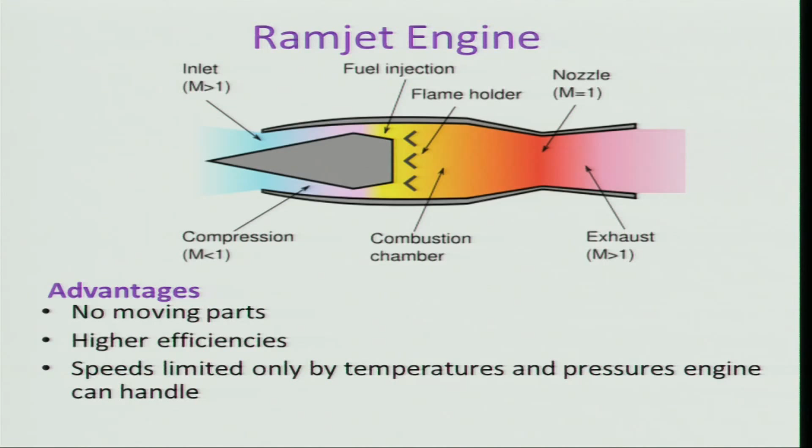It has several advantages over the turbojet engine categories, because it does not have any rotary parts, it is quite light compared to others, it has higher efficiency, and its speed is limited only by the temperature and pressure the engine can handle. That means material problems can be avoided, but its disadvantage is that it cannot start on its own, particularly for the initial takeoff thrust. That is the big problem, and as you go along you will see how it can be solved. This is being used in missile systems as of now.

There is another exotic engine which has come up, known as the scramjet engine. Unlike in the ramjet engine, here combustion takes place in the supersonic mode. Keep in mind that this is quite an exotic and interesting engine, which people have been trying from the 1950s till date, however with very limited success. India has a very ambitious program of developing scramjet engines, and a lot of money has been pumped into it.

Two organizations, particularly DRDL and VSSC, are working at this moment on concept development of these engines, and it has several applications apart from the missile application. It can have terrestrial applications as well, particularly whenever the vehicle is moving in the atmospheric region. So, let us look at a schematic of that. The air intake region starts from here, and it is quite long, because the flow will be at a very high speed.

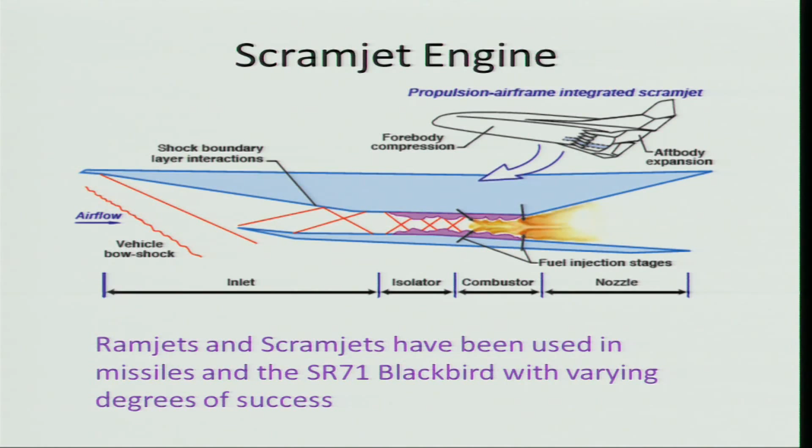And not only India, but several other countries like USA, Australia and others are working vehemently on it. But I have one question to ask you people: do we really need to have this engine, because it guzzles a large amount of money, and the material and other aspects also have to be looked at. So, particularly from the Indian perspective, whether we could look at it.

Of course, a lot of young people are excited about this engine because of our icon Dr. Abdul Kalam, who is an icon for the students to follow, and we should look at this aspect and see how it can be used for the common human being rather than for winning a war or for a limited number of people.

So, beside this we will be discussing how both the air breathing and non-air breathing engine concepts can be combined together, because each class of engine has its own advantages and disadvantages. Like a human being, each individual has certain good qualities and certain bad qualities, but when we combine together and work in a group, we try to maximize the good qualities so that society or a system can run. Unfortunately, it is not happening in India, but that is desirable, and it is more natural.

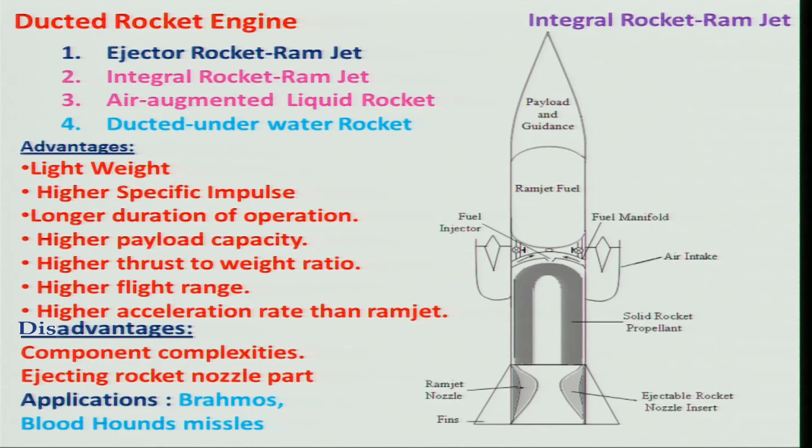Let us look at the air augmented liquid rocket engine. In this case, it will be similar in nature, but there is a little difference. There will be a rocket thrust chamber, which is not shown in this diagram, and you will take the air all the time, continuously feeding, and then there are liquid fuel injectors which will be working. That means you need not eject the rocket engine, because it is a liquid fuel rocket engine itself, but to start with you will start with the rocket engine, because enough air may not be there. After that, you will be going to the ramjet mode.

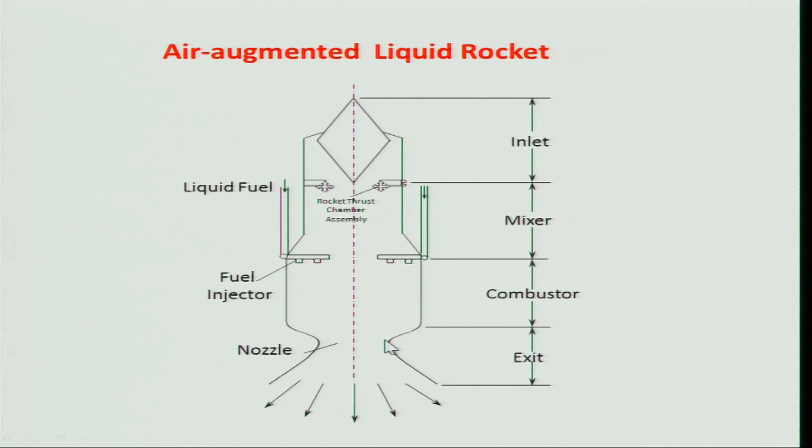Now we will be looking at the turbo-ramjet engine. Why are all these engines coming into the picture? Because of the inability of the ramjet engine to give initial takeoff thrust. In this case there is a turbojet shown here, and to start with the air will be coming through the diffuser or air intake into the turbojet engine, and it will have various components. As I showed you in the last lecture, it has a compressor, a combustion chamber which is not shown here, and a turbine. Of course, there will be a gas.

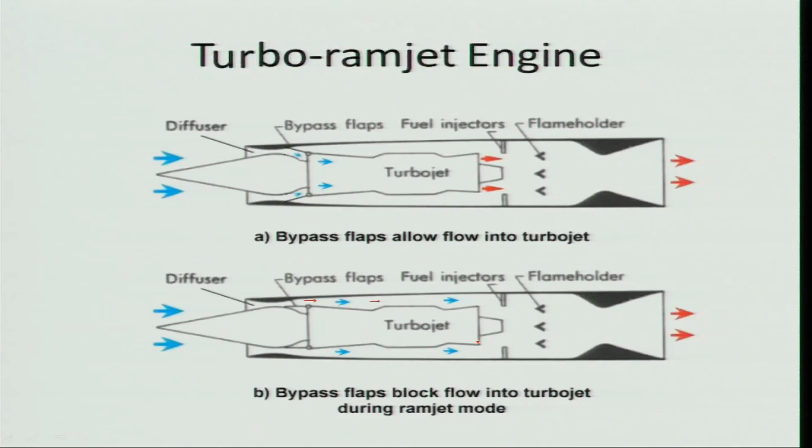In this case, a nozzle need not be there; it will be expanded in the other nozzle. These are bypass flaps, which allow the flow into the turbojet engine. Whenever you move into the regime where the ramjet can be operated, you can put the turbojet off with this bypass flap, which blocks the air from entering the turbojet. However, it will enter the ramjet components, and you will get the thrust. The good thing is that you can always restart the engine. That means it can be reusable, like you can land it and take off again.

But the bad thing about this turbo ramjet engine is that you will have to carry the weight of the turbojet along with you. So sometimes you will have to find out what the mission requirement is, and whether you can use it or not. It has been used for missile applications and other applications as well.

So, now we will be moving into the non-chemical rocket engines. Before getting into that, I have given you a bird's eye view of the new combined cycle engines, and several varieties are there; you can look at them if you are interested. However, I will not be discussing them now. We will be moving into the non-chemical rocket engines, in which I will be discussing nuclear power rocket engines, solar power rocket engines and electrical power rocket engines.

I will be giving you a very short, bird's eye view of the whole concept, and then I will be concentrating only on the chemical propulsive devices. So, if you look at nuclear power rocket engines, why does one have to go for nuclear power rocket engines? Why can't chemical propellants, which have been used from time immemorial, be utilized for the rocket engine? Can anybody tell me?

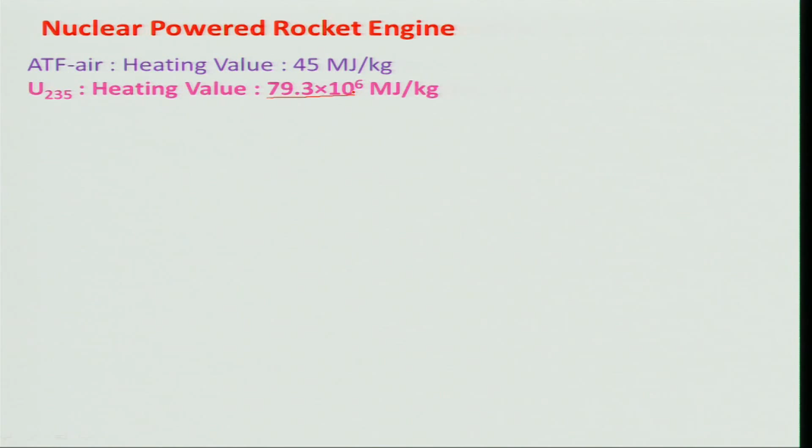Whereas if I use uranium 235 and bombard it such that nuclear fission can take place, the heating value will be 79.3 into 10 to the power 6 megajoule per kg. That means you can use a higher amount of energy for producing higher thrust. So, therefore, there is not much limitation. However, it is not that easy to use because of several problems associated with it. You might be aware that recently in Japan there was a catastrophic accident which caused a lot of damage to the people and the environment as well.

Nuclear power rocket engines can have three kinds of reactors: fission reactors, radioactive isotope decay, and fusion reactors. In the fission reactor, the nucleus of uranium 235 will absorb a neutron. During the process of fission, when uranium 235 absorbs a neutron, its energy level increases, and then it splits into two nuclei, one krypton and the other barium, and it also generates a large amount of energy.

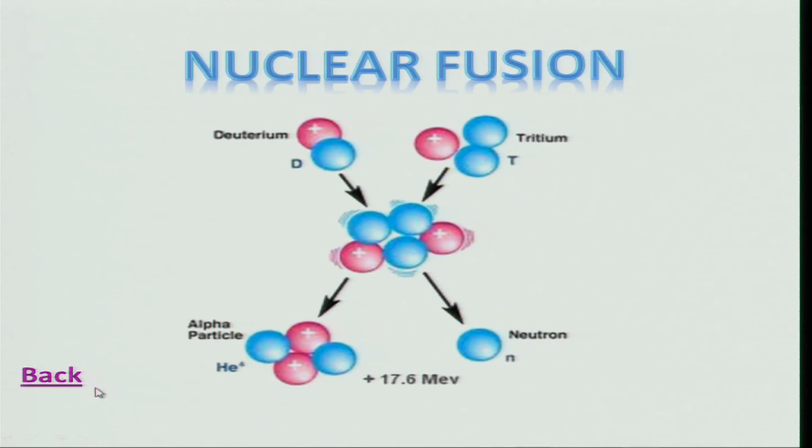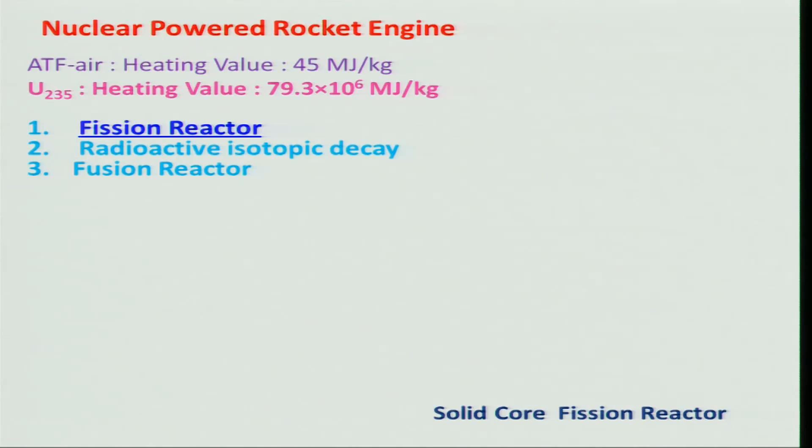And this energy can be utilized for rocket propulsion, but unfortunately till now it is not successful even in civilian use, forget about this application which is military and other planetary applications. And radioactive isotope decay generally happens, but it will not have much application so far as rocket engines are concerned. So I will be giving you only one example, that is solid core fission reactors.

The schematic is being shown here, and here you can use any other propellant which will have good thermophysical properties, or rather heat capacity to absorb the heat generated in these nuclear fission reactors. And here hydrogen is being used, and it is being pumped at a high pressure. It will go through the nozzle. You will look at the outer casing of the nozzle and also the reactors. This is typical of what is being used in liquid propellant rocket engines.

The hydrogen will be flowing through it, it will absorb some amount of heat, it will be converted into gas, and then it will be entering into the nuclear reactor core. And keep in mind that this has a control rod, as I told you that we need to control this generation of neutrons. So this will be controlling that, and this will be absorbing the heat. Of course, there is a reflector, cooling jacket and other things to contain the reactions.

And besides this, some of this hydrogen is also used to run this turbine, otherwise you cannot have a pump. And after that, it is a typical chemical rocket engine kind of thing. This is high pressure and high temperature hydrogen, which will be expanded in a nozzle, and you will get a thrust. So, if you look at it, a very high thrust level around 40,000 Newton or 40 kilonewtons, even higher, one can get easily, and temperature is restricted to 2500 Kelvin. However, higher temperature one can use, provided better material is available.

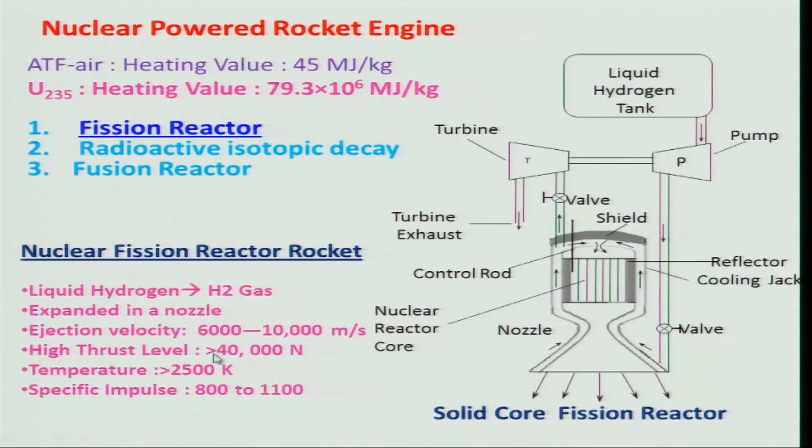And high specific impulse you will be getting as compared to chemical rocket engines, and ejection velocity you can get at very high values. And we will be looking at the electrical power which can be used for producing a thrust. And of course, these engines have a limitation of lower thrust. However, they can be utilized in space, particularly outer space, where the thrust requirement is not very much.

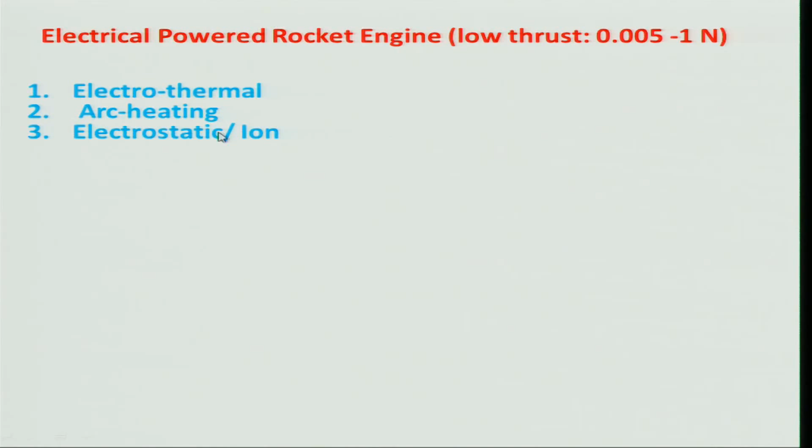And there are several ways one can think of: electrothermal, arc heating, and electrostatic or ion formations. I have taken only electrothermal rocket engines, where electrical energy is being utilized to generate some heat. You must be aware that heat can be generated by several means. One of the easier ways is using a resistance. You can have inductance, you can have other ways of generating heat, converting electrical energy into it.

In this case, what I have shown here is basically a heating coil, what we use during the winter season to heat the room or for food preparation. It is as simple as that, but it has to have a little more energy density. That means the amount of energy released per unit surface area must be higher, because it must be compact, and then you can use various propellants. Propellant can be hydrogen, it can be nitrogen, it can be ammonia, it can be any other thing, and in some cases you can use some kind of monopropellants, where it can react and release energy as well.

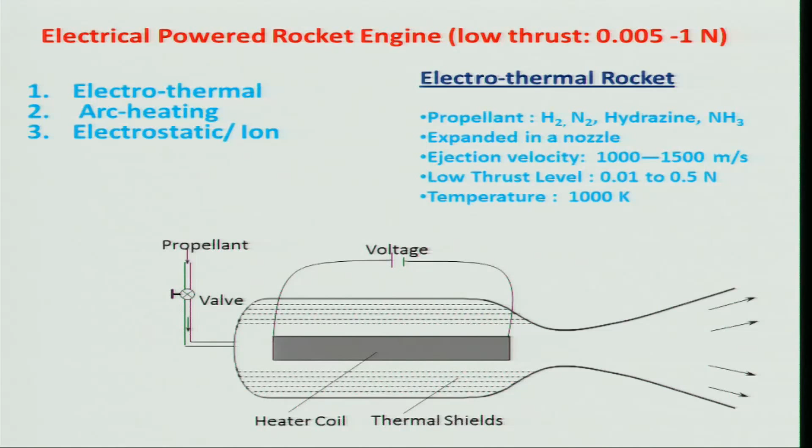And it is like usual rocket engines, where the high temperature gas at a high pressure is expanded through a convergent-divergent nozzle to produce the thrust. So this is the basic thing about the electrothermal kind of rocket engine. There are several varieties; we will not be looking at all of them, but those of you who are interested can look at them leisurely.

Whenever a spark is produced, very high temperature is generated, because we know that in the case of simple electrical heating, high temperature cannot be achieved. For that you need to give a very large amount of heat, whereas here you can get high temperature very easily, and the higher the temperature, the higher the pressure, and it can be expanded to get a higher thrust.

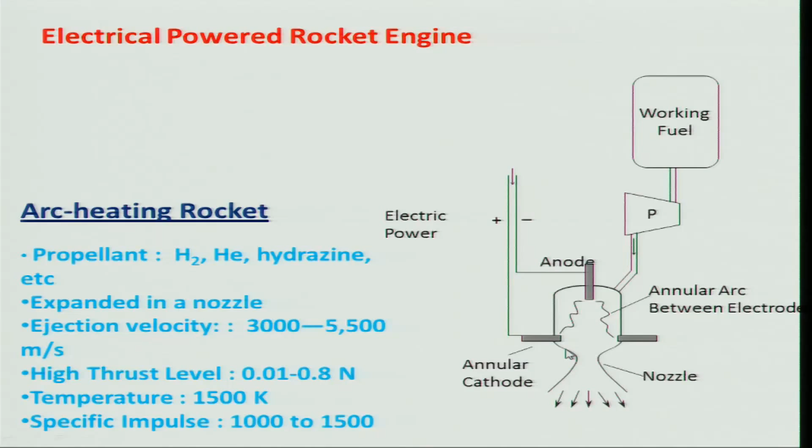So, this is one variety of arc heating rocket engines, but there are several other varieties as well, which you can look at in the literature. But let us now move on to another variety of engine which we will be discussing, the electrostatic or ion rocket, and it will be different from what we have discussed.

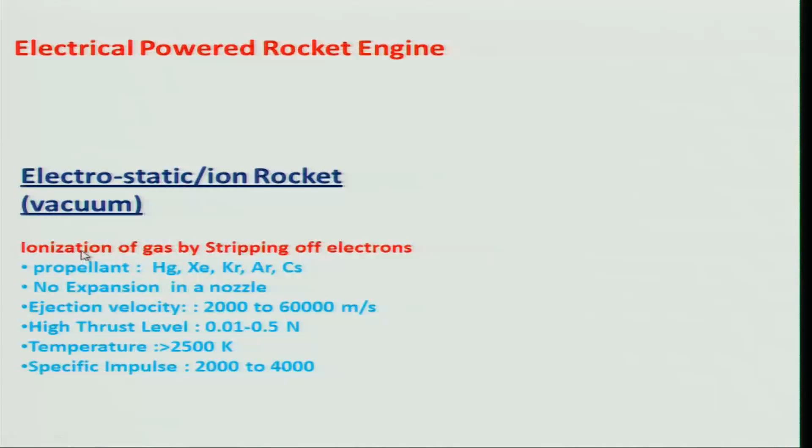which will be fed from the tank with a feed mechanism, and you will use electrical power to ionize it. And then these ionized particles will be accelerated by electrostatic forces. You can also apply electromagnetic forces, and you can accelerate them to very high velocities like 2000 to 60,000 meters per second, and generally the velocities used in practical systems are around 25,000 to 32,000 meters per second.

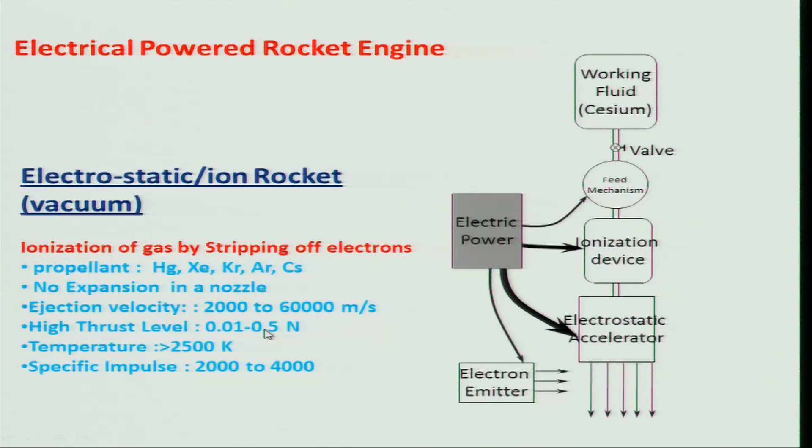You will get, of course, a little lower thrust, but it has no nozzle and it is a very compact and small system, except you need higher voltage sources. These electrostatic engines have been used by the Russians in outer space. Let me look at an actual one, like the NSTAR ion thruster used in deep space. As I told, it has two components: one is the ionization section, the other is the acceleration section.

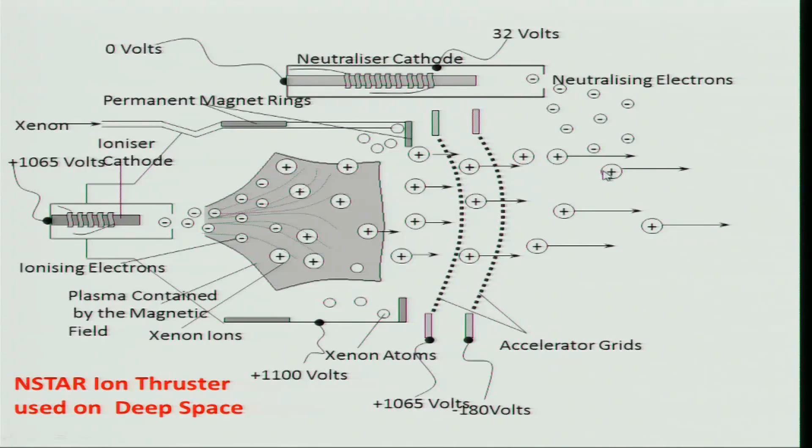But after the grid, you can have these neutralizing electrons, which will be combined so that it will be neutral, and it does not have a detrimental effect on the thrust being produced by the ion thruster. So, this is about the electrical rocket engines. Now, we will move into the solar power rocket engines.

When you talk about solar power rocket engines, there are several kinds, but I will be discussing solar thermal rocket engines. You might have seen in satellites there are solar panels to give some energy, and that can be utilized to propel as well, because we have seen the electrical rocket engines, where you can use it in an ionization thruster or something else, particularly in deep space. But those things have limitations.

What are those limitations? The efficiency of solar cells and panels is quite low. It will be around 10 to 15, or some people claim 20 percent, not more than that. So, there is a lot of challenge to improve solar panel efficiency and solar absorption, which will be beneficial for land use as well, because after maybe 100 years there will be hardly any fossil fuel left to be used.

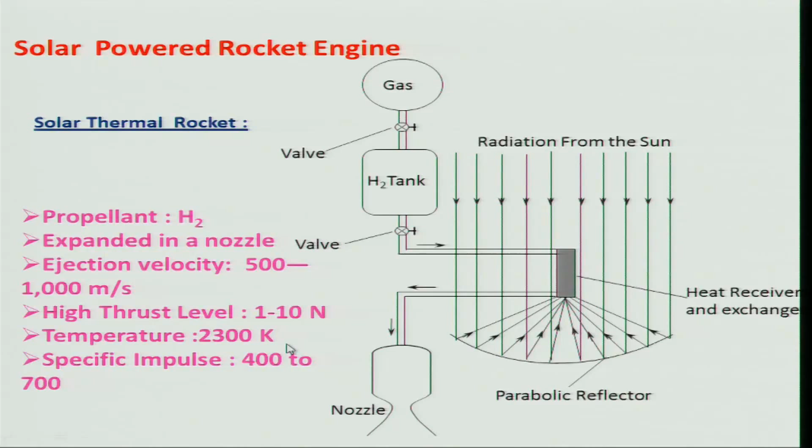And of course, the ejection velocity is limited to low velocity, because it is similar to your chemical rocket engines, unlike your ion thruster or electrical engines. So, this is very rarely being used; however, a lot of research is going on to make this compatible.

And the main place where rockets are being used, or all the development, I always feel is motivated by winning a war, that is a missile. But I feel that war we should avoid. Actually, I always feel that war lies in the mind of the people and must be removed, so that we can have a peaceful existence in the world.

And besides this, for research airplanes rocket engines are used for conducting research, like recently the scramjet engines, which were fired from a very big, huge aircraft. You might have seen it in videos; nowadays it is available on YouTube. So, the ejection of escape capsules, for which the rocket engine can be used.